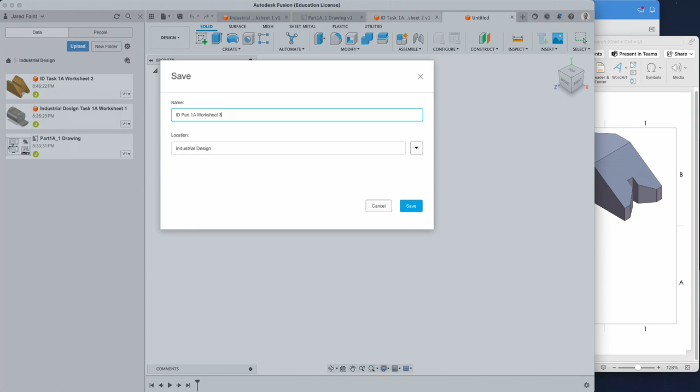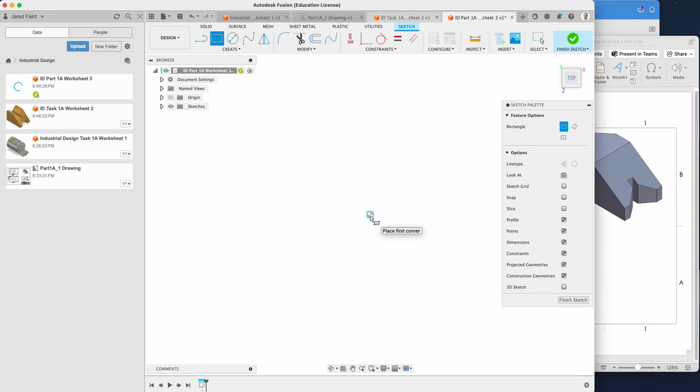I'm going to go onto the top, that's ready to go, and select on that. If I have a look, I need 70 by 110, so 35 by 110 is my outside. I'm going to do the top, so 70, so 35 by 110. There's my starting space. Notice if I press the center scroll, it allows me to move it around flat. It's quite a handy little feature.

If I have a look, I need 10 down, and I'm going to go 20 there and then 140. I need a line through there. Then I'm going to go dimension in that. So actually I want to do the top, didn't I? Undo that, try that again.

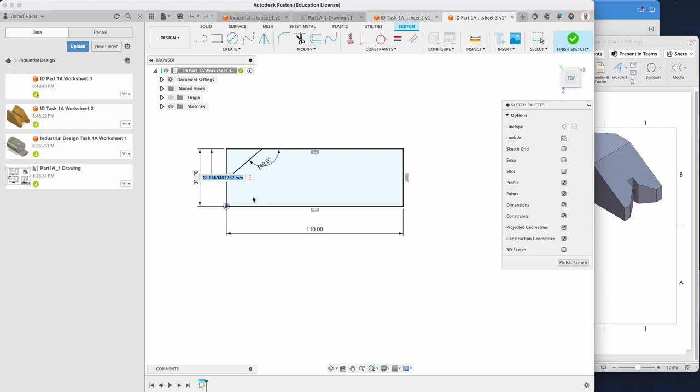Line, dimension, him to him wants to be 140, wasn't he? That side, so there, 140, there it is. And then this one to that one needs to be 20, and that should leave us then 15 on that side. Excellent.

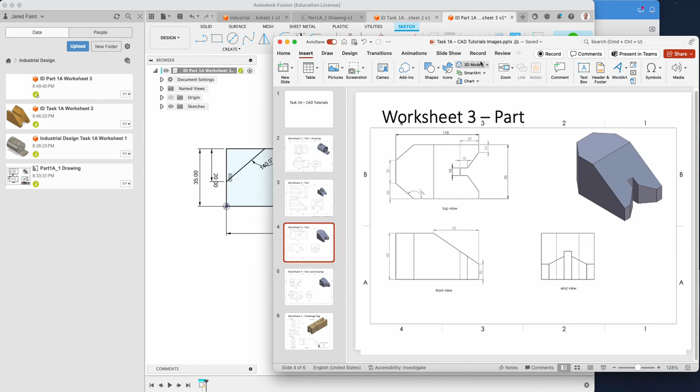All right, so then we've got the other end. We're going to work from this corner here. So I need to go down 10, in 10, 5, and then build it from there. Okay, let's just move that across so I can see that as we're going. So from that top one, we're going to go down 10, down that way, in 10, and that'll be down 5.

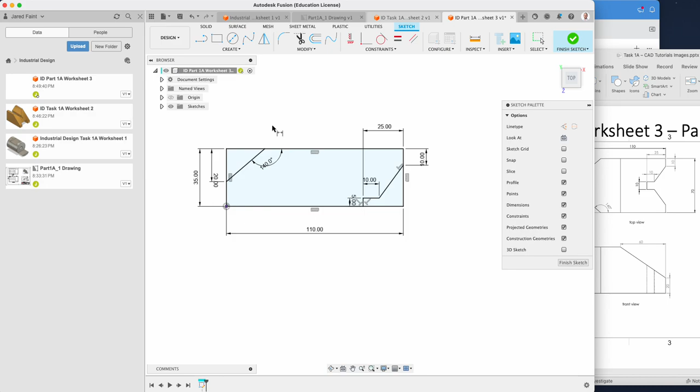So now let's dimension that in. From there to there is 10. That guy there is 10. That guy there is going to be 5. And I've got 25 from that point to that point. Excellent, so that now gives me all that I need for that top. I'm going to leave the other parts in. You can see I've got it fully dimensioned, which is fantastic.

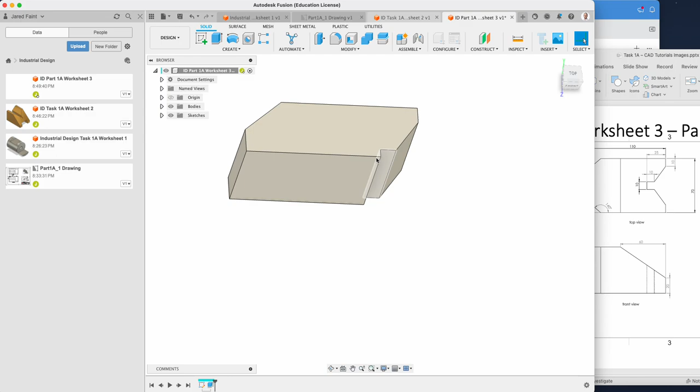I finish the sketch. From here, I'm going to extrude that part there. Doesn't matter which way I go this time, but I'm going to go up the 60. There it is. What I'm going to do now, like I did last time, is mirror that body, select that plane, and that gives me, if I go back to my home, him ready to go.

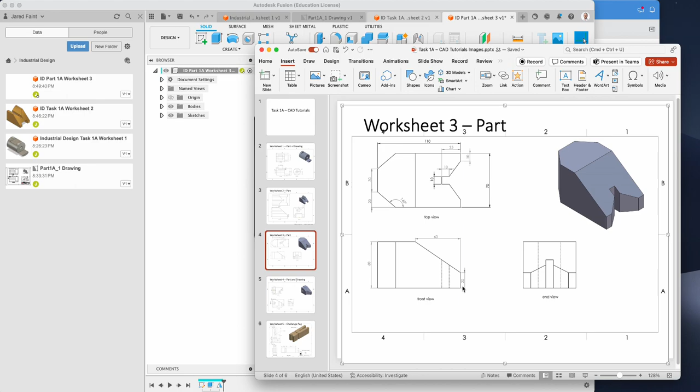The next thing I need to do is then go onto that front edge and cut my triangle out. So 20 from the top, 60 from that corner. I'm going to go onto that face, and I'm going to create sketch. That's ready to go. So from this corner, I need to go there, there, and there.

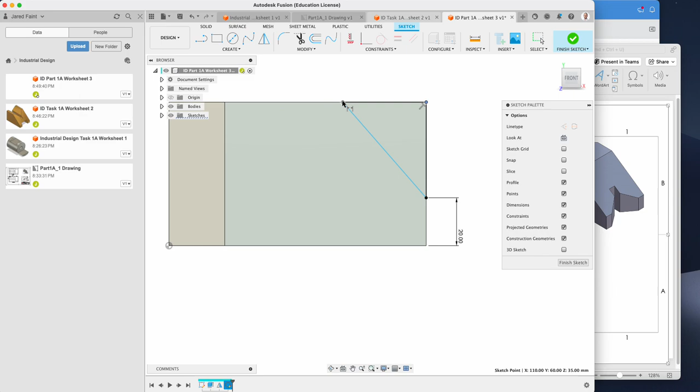And that was 20 there, and 60 here, which then builds it out. Again, constrained and locked in. You can see we've got a constraint there, which is great.

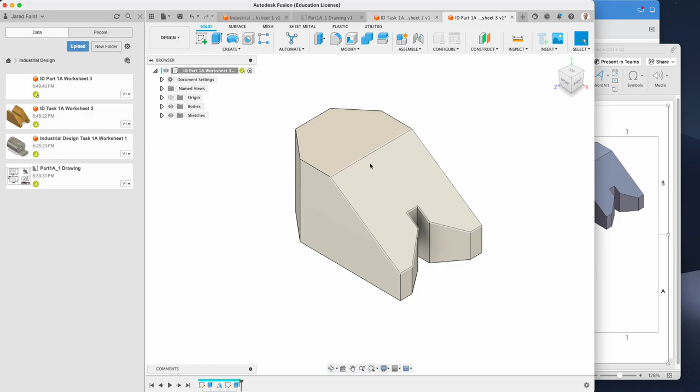What I'm going to do then is extrude him, and I'm going to again go through all. So now I have my block ready to go. Again, I'm going to leave the drawing on that one. He's ready to go. Save that, and that's us.